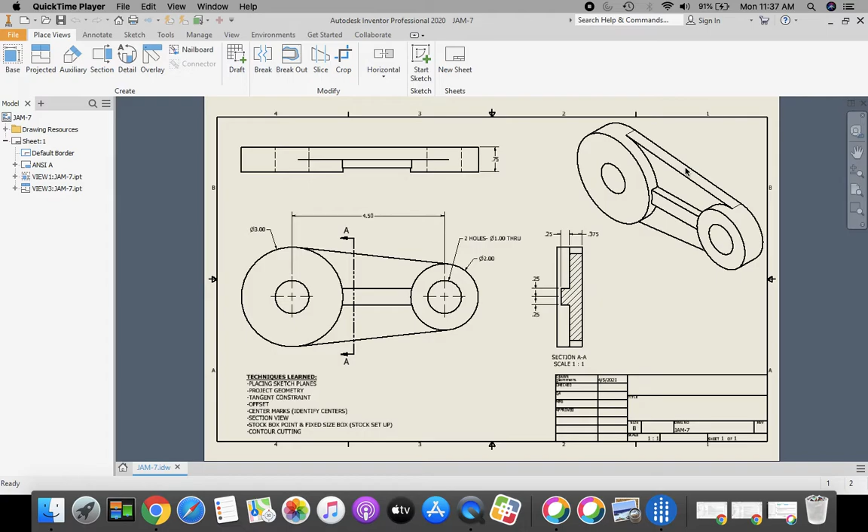To begin, come on along to our Inventor home screen. I'm going to come up to the top to the ribbon bar and select Open. If it's not already identified, I'm going to select my H drive, first initial last name 000, all the way down at the bottom, and then I'm going to scroll down and find my 7 jam part and click Open.

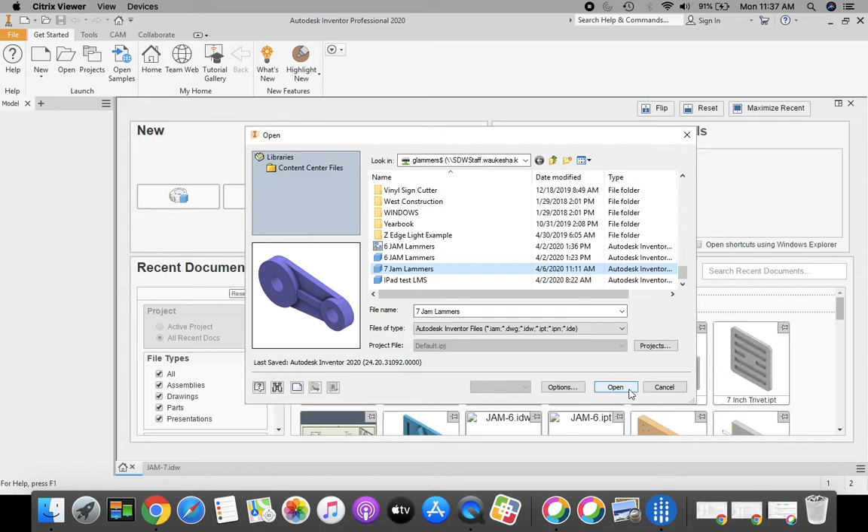Okay, once our part loads up, I'm going to select CAM from the ribbon bar at the top, way up above in the tab area, and I'm going to select Setup from the ribbon bar. For setting up this part, a little bit different for us. We want to make sure that our origin says Stock Box Point, and I want to click that lower left-hand corner that you see in the front here.

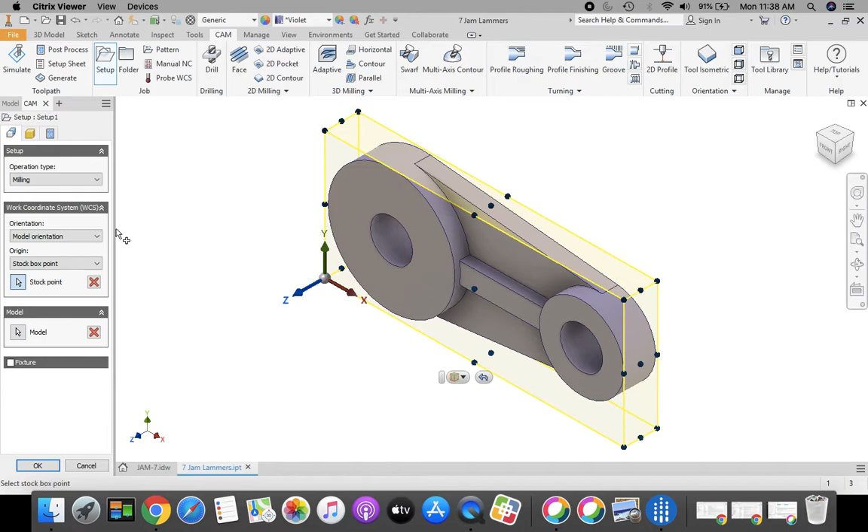Next, moving across to my stock setup, changing this on us a little bit. We're going to change this from relative size box to fixed size box. Fixed size box. And I'm going to have my width. I'm going to highlight that and I'm going to change it to 8. I'm going to have my depth, highlight that, change it to 4. And on my height, I'm going to highlight and change to 0.75. That's the thickness of my part.

So once again, new for us a little bit, fixed size box, change your width to 8, depth to 4, and your height to 0.75. Final tab in our setup is where we enter in our program name. So we're entering our part name, 7 jam, and then put your last name after that. And then click OK.

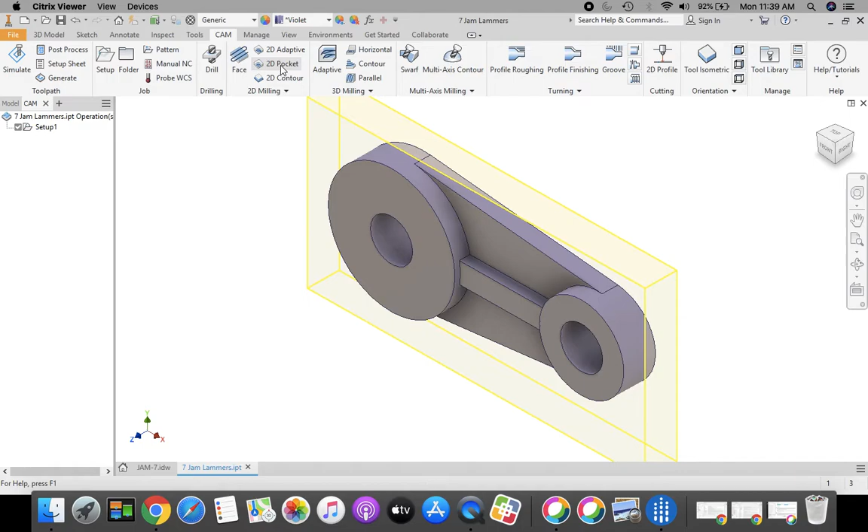Okay, to cut this, we're going to start off with 2D pocket, and we're going to cut the top of our platform off here and the top of our rib. So let's come up to the top, 2D pocket. We're going to identify our tool. Now remember, if this model browser over here is collapsed, get your cursor on the side, and let's expand this a little bit so we can see all of our tabs.

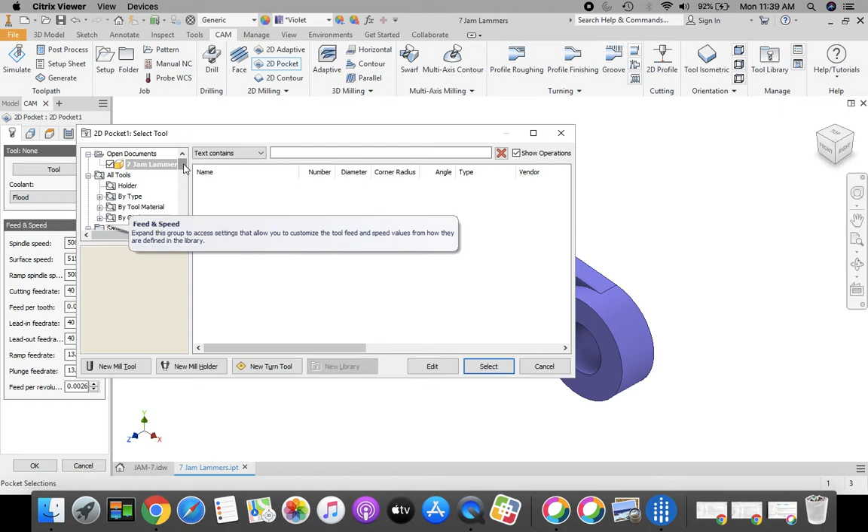Okay, we're going to identify our tool. Click the tool button. Two ways you can do this. Come down to Sample Libraries, choose End Mills, and we want to select Tool 2 1/4 inch flat. Or you can scroll all the way down to the bottom, Butler MS Tool Libraries, tool number 2 1/4 inch flat, they're the same. Click Select. You can see our tool hovering over our origin there.

Let's move across to our next tab where we're going to select our geometry. And here we want the top of this platform on this side, the top of the platform on this side, and I want the top of that rib also. So all three of those areas should highlight blue. Okay? Make sure you're clicking the tops of each one of those areas, not the side in here.

Okay? Let's move across to our heights and establish these. Clearance height, model top, and we're going to change to 0.2 for our offset. Once again, model top and 0.2 for the top three here. Okay, clearance height, retract height, feed height, all model top 0.2. Move across to our next tab where we establish our passes.

This is quite a bit of depth that we're cutting in here, so we're going to select multiple depths. And our maximum roughing step down distance right here, we're going to change to 0.25. Scroll down, and I want to uncheck stock to leave. So I want this to cut right up next to that circle, right up next to the rib, and right up next to this other circle. So no stock to leave, uncheck that box.

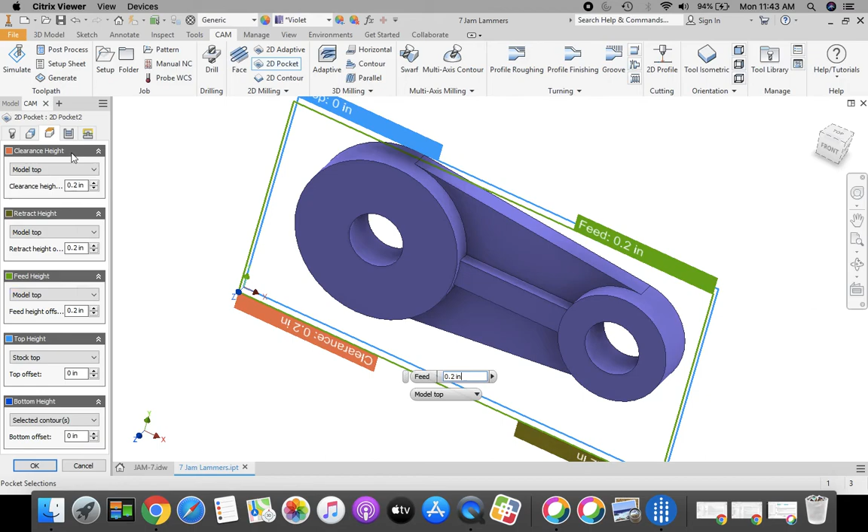Moving across to my Passes tab. That is quite a bit of depth there. That's 3/4 of an inch thick, so we need to take that in multiple depths, otherwise it's going to put too much strain on that bit and might break the bit.

I'm going to take the maximum roughing step down distance and change it to 0.25. I want it to cut right to the outside edge of this cylinder, so I'm going to uncheck stock to leave. Multiple depths is checked, 0.25, have to do that, too much strain on the bit could break it. It's 3/4 of an inch thick, got to take that in multiple depths.

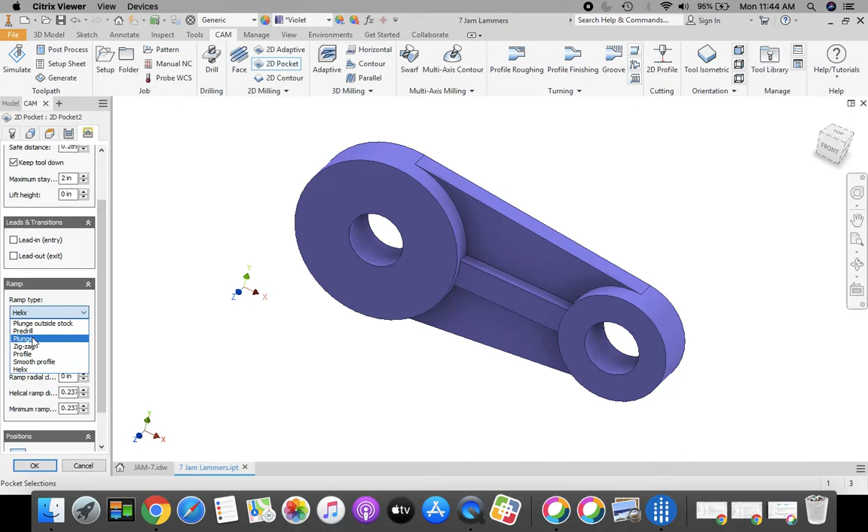Next let's move across to our final tab, Linking Parameters. We're going to come down where it says lead in, uncheck that, lead in unchecked, lead out unchecked, and we also are going to plunge these. Once you're finished with that, select OK.

And now for our fun one, I'm going back home for this. What we're going to do is that 2D contour where we're going to cut around the outside edge of this.

We're going to re-identify that tool. Once again, that's a 1/4 inch, tool number 2, 1/4 inch flat. Click Select. I'm going to go across to my Geometry tab.

For this, I'm going to get that bottom edge of my part way on the back. See it highlighted in red back here? That's what I want to select.

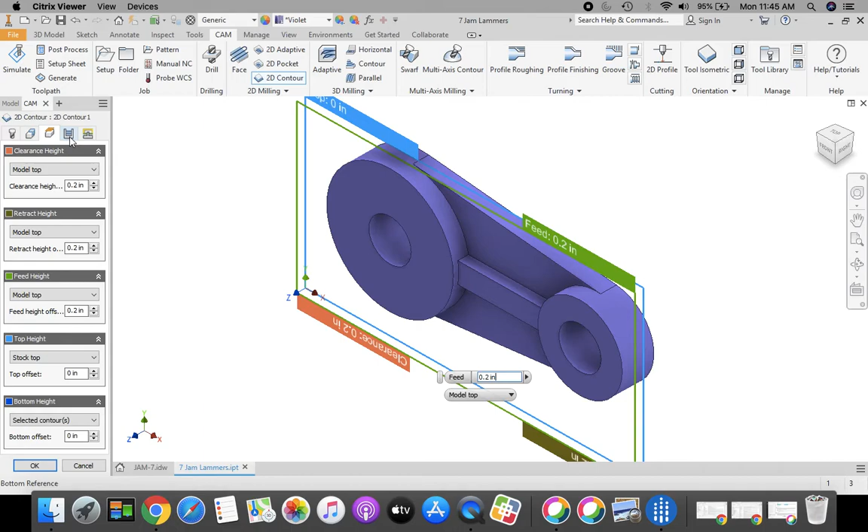Moving across to my heights, establish those again. Each one of these goes to model top and point 2. I'll give you a second to do that. Going across to my next tab, for establishing our heights.

I'm going to check multiple depths, because after all that's 3/4 of an inch thick, right? We're going to take that maximum roughing step down distance, 0.25. So once again in this 4th tab over, we want multiple depths checked, change your maximum roughing step down distance to 0.25, and let's go across to our final tab.

In here where it says lead in, we're going to uncheck that. We're going to lead out, uncheck that, and our ramp style we can have that off.

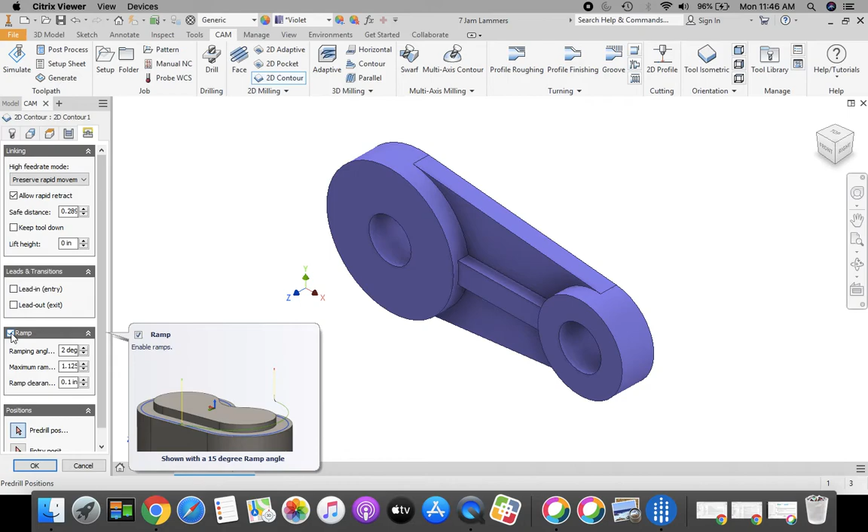Now the one thing that we definitely want to do on this, everybody's going to come with me, we're going to come back over to our Geometry tab. We're going to click on that, and we want to make sure that you have this tabs option selected. You know that tabs is selected when you have these little boxes that pop out here.

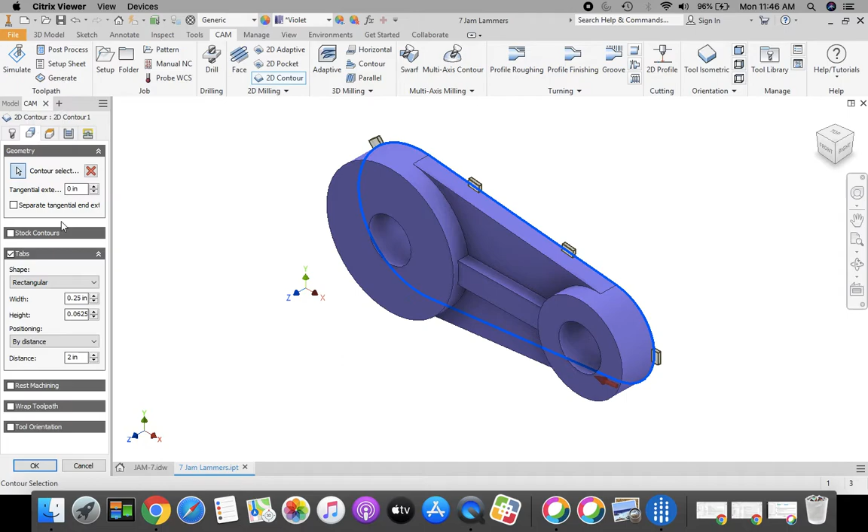This allows us to cut this part and contour it. It leaves these little tabs in here that will break off later, but this lets us have it clamped into the mill without it coming out. So we went across all the tabs at the top, came back to our Geometry tab, and we want to make sure this tab option is selected, then click OK.

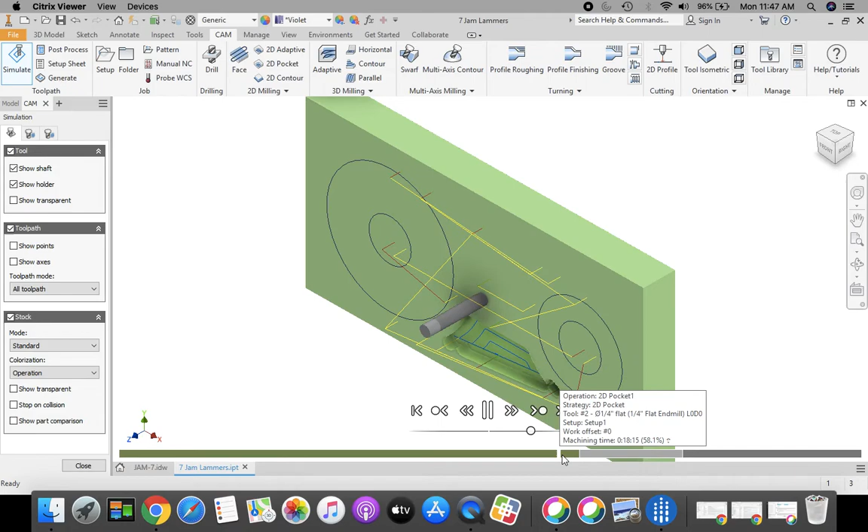Next, let's take and simulate this. Click Simulate, let's turn our stock on right here, and you're going to click Play. It's going to come around, cut your areas for that base, the top of your rib. It's going to bore out those two holes on each side, and then come around and contour cut the outside of your part. Let it play through.

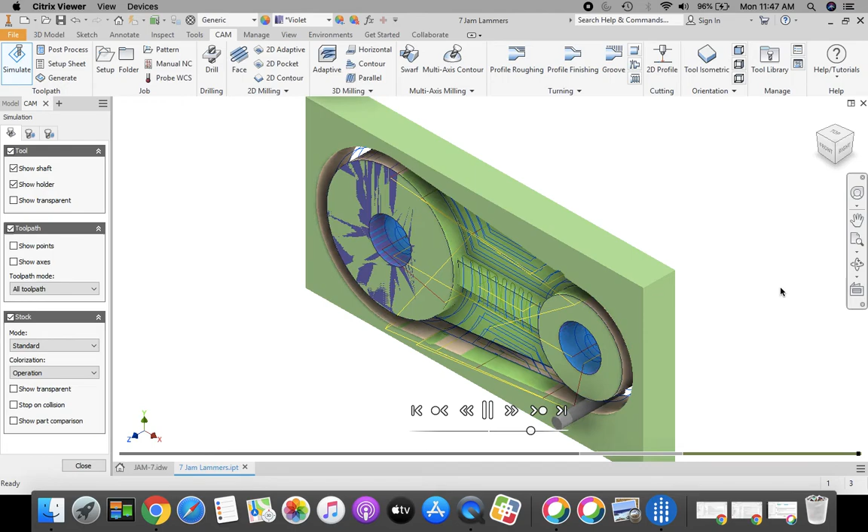Now we're going to get our rotate tool. We're going to rotate this up just a little bit so that we can see those awesome tabs that are sitting in there. Click your rotate tool again to let go of it.

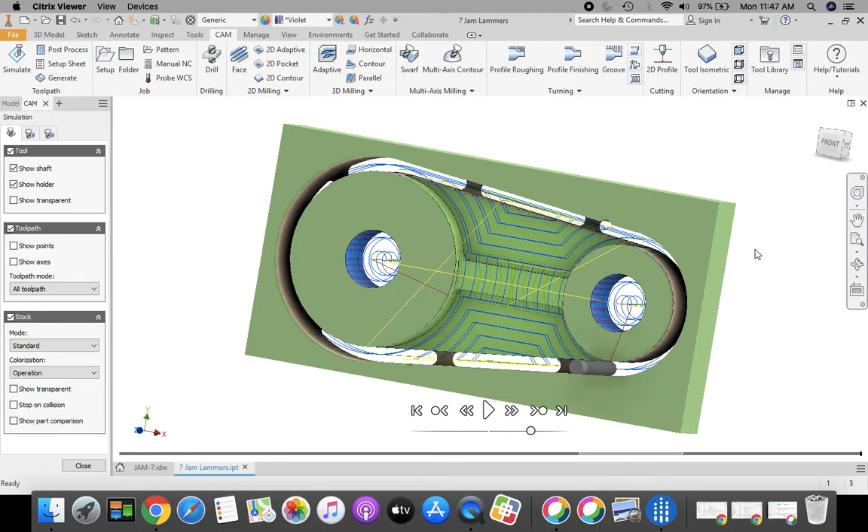Okay, once your screenshot is done, let's go up to the top, finish this off. Let's select Post Process.

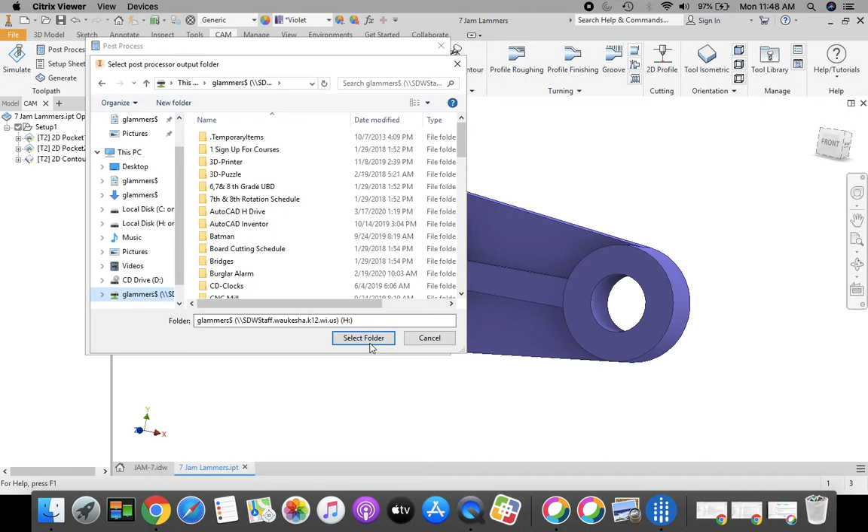We're going to make sure that this is going into our H drive. So this gray box right here, we're going to click it. We're going to scroll all the way down on this left-hand side and select your H drive. First initial, last name, dollar sign has the gray box and your green line. Click Select Folder. We have our part number right in there, 7jam and your last name. Click Post.

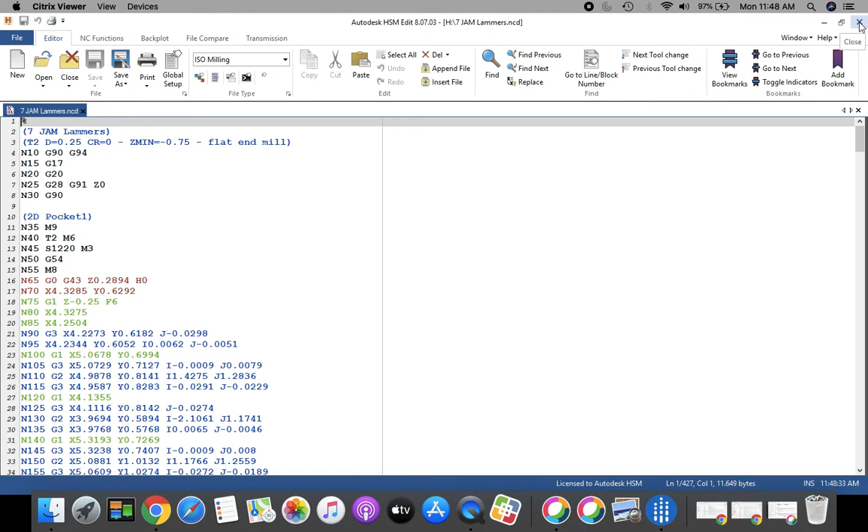Click Save, then we're going to X out of this file editor using the top X button up here. And the last thing we want to do is go to the orange file and save. That updates our part with these toolpaths on it.

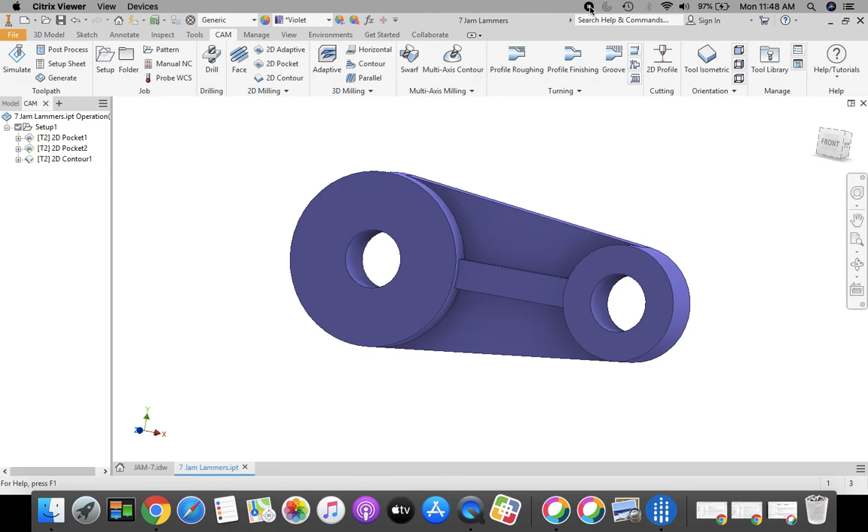The next video is going to be creating the drawing for this part and then creating a standard ID.